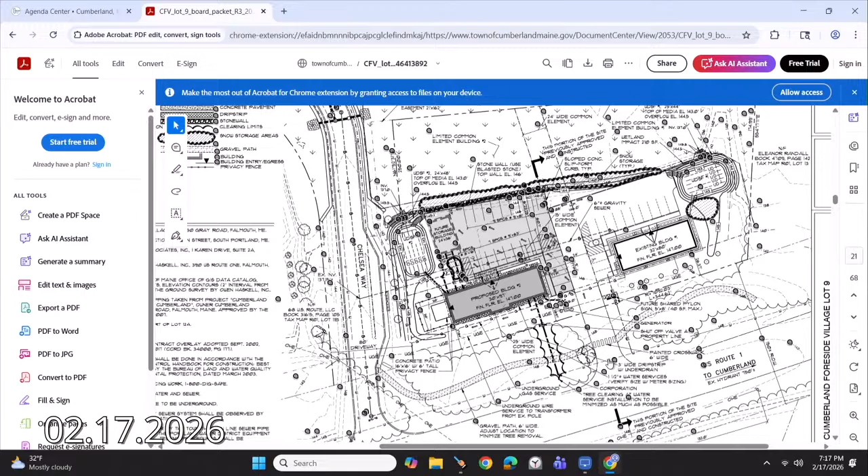Okay, and you have no idea who the new tenants or new owners will be, but you're convinced there's a market for it as well? I have no idea who the tenants will be on the first floor, commercial-wise. I'm very confident, owning 96 units behind there, that we'll be able to fill 2 luxury apartments up above, and I'm very confident that we'll be able to rent the 3 1,000 square foot spaces. I'm sorry, I guess I somehow missed that - so it's mixed use? Yes, mixed use. Oh cool, yeah okay. I apologize if I didn't make that clear. No, very cool, yep.

Any other questions from the board? Hearing none, I'll open up the public hearing. Is there anybody in the public that wishes to comment on this?

Bob Vale, Cumberland Center. Just a point of procedure. This is, in essence, a new application. The permitting has expired, so was the town attorney consulted? I would think that at a minimum it should be tabled. Like you said, we're in uncharted waters, and there's a chance of precedent being set here, so it should be tabled and a town attorney provide direction, because I think the findings of fact need to be read.

I agree, it is new. We agree with that. Yeah, I looked at it as a new application. That's the way I reviewed it. It's 8 years old, so it is new, we agreed. We're treating this as a new application. It's just that you already have all the information necessary to make a decision.

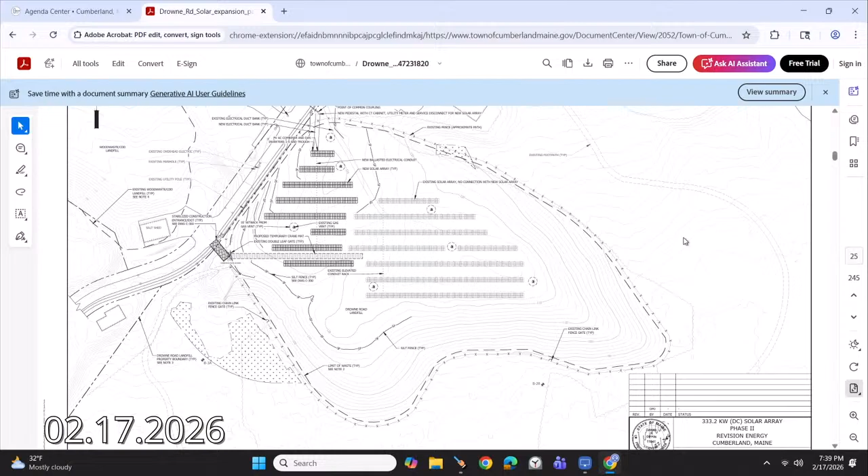I requested today if they could give me a projected timeline of that approval. It varies a little bit. The solid waste approval isn't tied to the timeline standards of the Land Bureau right now. So the last couple of these that we've done range from about 3 to 6 months. Ideally the DEP is through their approval later this spring, and then we'd be able to pursue construction in the dry summer months, which is the ideal time to be on a landfill cap to minimize any damage to the cap. So I can quickly walk you through the plan and then take questions.

Similar to the other system, the interconnection is at the north of the site. This project can exist within the existing fence, so there's no additional fence needed to meet electrical code or security needs. A couple of updates to the system from the other one, since this landfill project is about 6 years newer.

The old project had cast-in-place concrete ballast, which sits atop the landfill cap, so there's no penetration of the cap. The newer system uses what's called crushed stone ballast. So instead of bringing a concrete truck onto the cap, you essentially have crushed stone and assembled baskets that sit on top of the cap as ballast, and the racking system is built into those — crushed stone versus concrete.

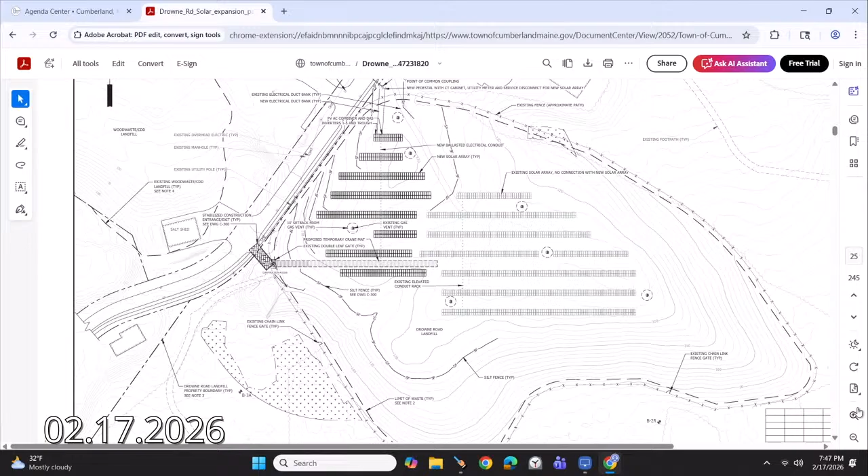It sounds as though I see no buffering - has anyone thought about the idea of that? Yeah, we talked about buffering with planning and codes during a pre-application conference. The conversation was that it would be consistent with what's there, to not create a significant change to the area. The bigger thing that codes had raised was that we can't plant vegetation within the limit of waste of the landfill, which goes pretty much up to Drowne Road, and the space between the road and the fence would be limited, where they had identified that as not something they would be looking to require. If it was something to look further at, then that's a question to reopen with codes, planning, and Matt. So that was the initial discussion.

How much room is between the fence and the road? Not much, not a lot. I think there's - and I forget what's right there because of the snow right now - a small grassy knoll, so not a huge amount.

So are you saying then that because of the cap, we can't do a buffer, or is it possible to do it? Driving up there, as close to the road as they are, I think it would be more aesthetic to put some buffering in there. I think it would be a question we can look at with codes and engineering, just with the space of that gap. If there's a standard on encroaching on the roadway with vegetation, if dense bushes adjacent to the roadway is an issue. But it's something we could look at with codes and engineering, to see what would fit in that space.

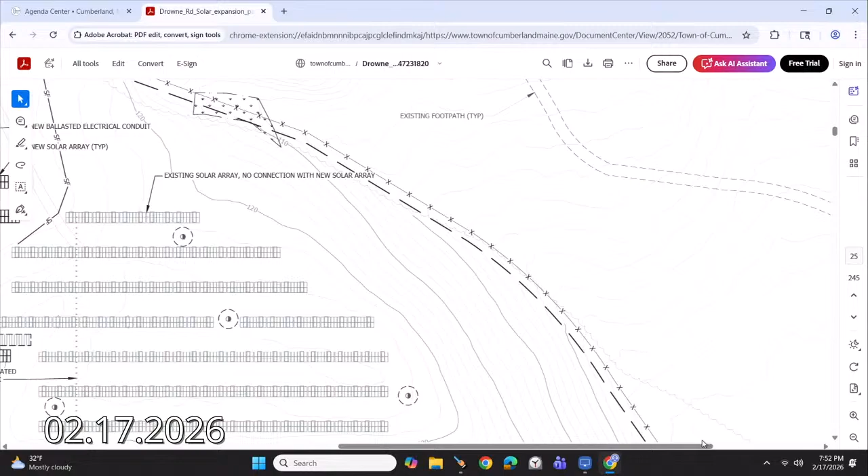This is a great project for the town. Specifically, it helps us meet our climate action plan goals, which have been laid out and approved by the council years ago. We were one of the first towns in the state to actually get a climate action plan. Fiscally, it sets us up in very good stead. It helps us towards electrical independence for all town facilities, town, not school, but that's huge for us, and it gives us long-term fiscal and financial stability without the volatility we all experience with our electrical expenses, most notably after January 1 of this year, based on my own experience paying my electrical bills. So it helps us in that regard, it gives us that stability.

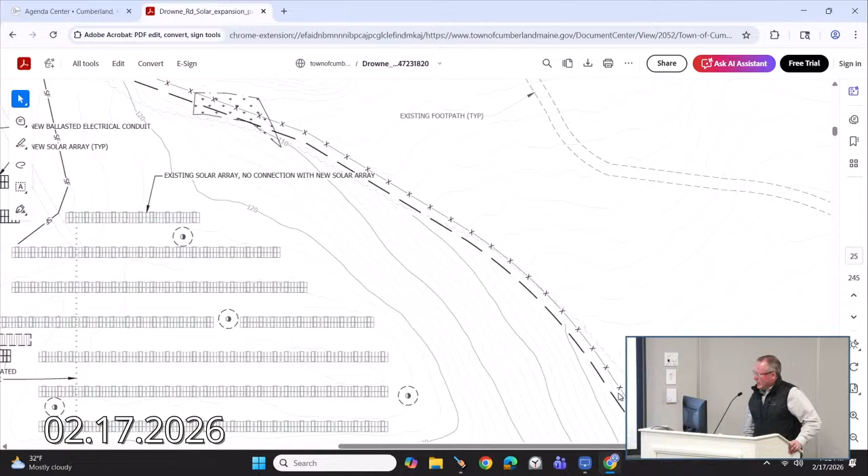We have, I think, a 6-year break-even point, and a big portion of that was the timing. We took advantage of the prior tax structure that expired December 31st or January 1st, which helped us take advantage of credits that exist out there to offset our acquisition expense.

That was significant. We also have the ability to use the renewable energy credits and syndicate those, so we can generate revenue from that as well, to the extent the market will provide it. That gives us some passive revenue to help offset the town's expense, which also expedites our break-even point. The big takeaways are energy independence, long-term financial stability, cost certainty, as well as meeting our climate goals.

Those are also very difficult goals to attain, so we're very proud of that, and the council funded it all this past year. The town had the funds available, so we took advantage of favorable federal tax laws and timing and good positions in the market.

Revision's been great to work with on that for us. If you want to go back and look at some council meetings from last spring and early summer, they looked at all the financials, provided good guidance, and expedited the acquisition. We needed to pull the trigger on ordering the equipment before the turn of the calendar, and they did all of that for us so we could take advantage of all the benefits out there. It's a great project for us.

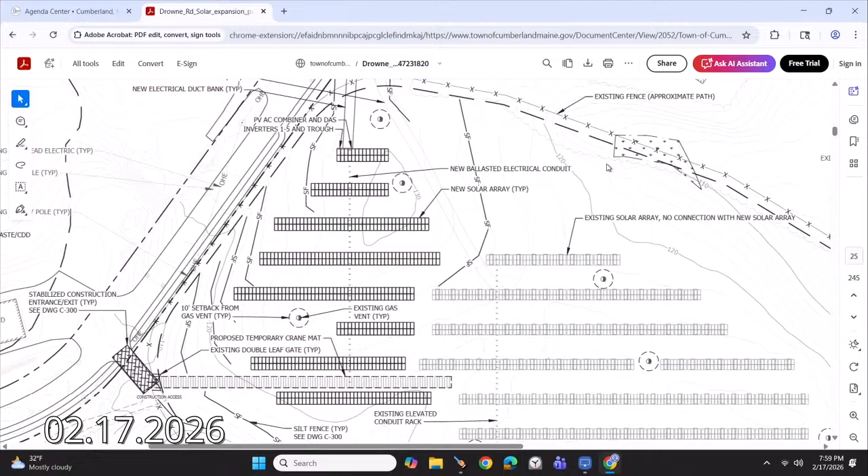Any other questions or comments from the board? If not, I'll open the public hearing. Is there anybody from the public that wishes to comment on this? Hearing none, I'll close the public hearing and go back to the board.

Are we ready to read the findings of fact? And I did it again—I listed the limitation of approval instead of the expiration of approval. At least it's consistent, rookie mistake. So Lorraine, can you lead us through the findings of fact? Yes, I can. Spreading the wealth.

Findings of fact are written as, I'm going to read: A, utilization of the site. The planning board finds the standard is satisfied because the additional array is situated within an existing fenced area and designed to minimize impact to adjacent properties and natural resources.

B, traffic circulation and parking. The planning board finds this standard is satisfied because the overall parking plan is unchanged.

C, stormwater management and erosion control. The planning board finds this standard is satisfied because the installation of the additional array will cause minimal disturbance that will not have adverse impacts on abutting and downstream properties.

D, water, sewer, and fire protection. The planning board finds this standard is not applicable because a solar array does not use water, sewer, or fire protection. The planning board finds the site is not located within a town aquifer protection area and finds the project will not impact groundwater.

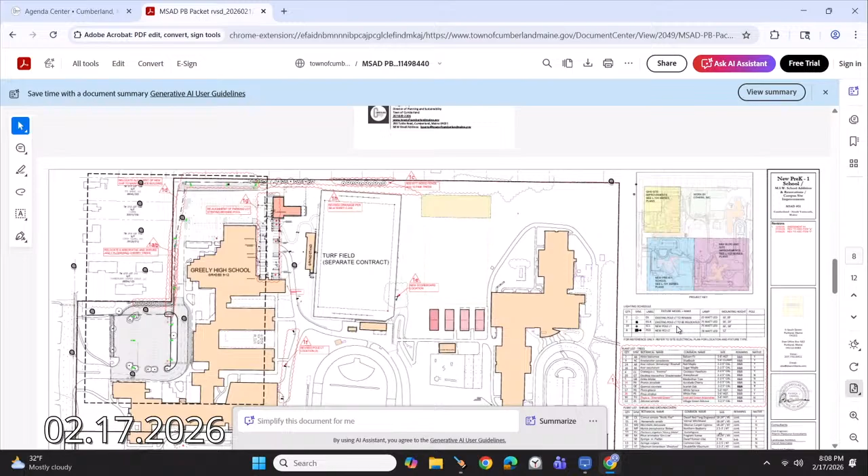Can you pull up the site plan? Yeah, it's in here. This one. Yeah, and if you could, maybe zoom into the upper quadrant, because that's really what we're talking about.

So my name is Pat Carroll, I'm with Carroll Associates, as Peter said. We've been working on a school construction project that started last summer. A lot of the focus of the amendment is really on work that was done during the summer construction period, summer through fall of this last year.

There were some changes that were made, a lot of which Bridget and Bill were kind of aware of, but we didn't formally go through with a de minimis change request as I think we're supposed to do. So I want to apologize for that.

I also want to apologize for missing last month's meeting. I don't know how that happened. I've been doing this for 40 years and I've never missed a meeting before, but somehow that one - I think it was a combination of the holidays, and I don't think we actually got an agenda. Usually we get one a few days ahead of time. We didn't get one that week, and I think Scott and I both kind of missed it for some weird reason. It was really kind of embarrassing.

I definitely missed it. But anyway, most of these changes are very minor in nature, but they are changes to the approved site plan. So I wanted to go through those with you, explain why the changes were made, and then offer any comments on any questions you may have about it.

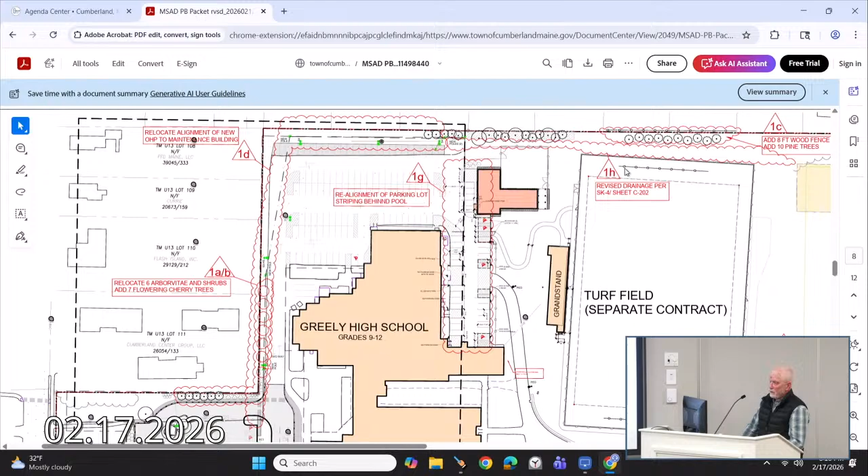So the engineer came in and decided that what we really needed to do was riprap that swale. There was a memo I submitted to you with his initial comment back to the contractor and the owner that we've tried to do this, these storms are really crazy, and we really need to get this done. We were at a point where we were ready to put turf down on this field - the base was all just perfect, it had been tested for permeability and everything else, and we had a pretty major washout, this whole corner had to be rebuilt right before this happened. So it was kind of an emergency situation that we needed to do this in order to stay on schedule.

It's definitely something we probably should have run by Bridget and the town engineer, but we did have our engineer update the stormwater management plan to include this riprap swale in their calculations, and everything seemed to work okay. I think the town engineer at Sevee & Maher has signed off on that. So those are really the improvements that we're asking for an amendment to the site plan on, and like I say, they're minor in nature. A lot of those we've had informal discussions with the town on, but we hadn't really made a formal requisition or request to have those changes made, and I guess we're going to do that from now on.

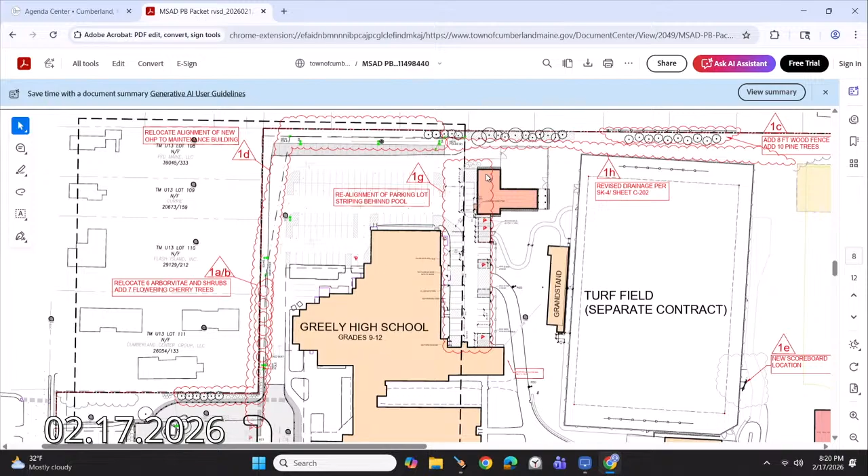Well, we can talk about that. It's not included in this, I don't think we've even broached it with Bridget yet. But there's a neighbor here that when the lights went in for this new maintenance building, they're over the garage doors, and they just shine down. The garage doors are white, and it creates a lot of glare. Scott's been working with this property owner, and we did plant some trees, and they have trees on their side of the line, but the lighting was still an issue.

And the headlights too. So we've proposed, and I think the neighbors agreed, to put an 8-foot fence in along that section of their property line, along with some changes to the timing on the lights. Are they going to go on a motion detector? A motion detector, so that should solve that problem.

So do we need to add that in as one of the conditions of approval, or how do we do that, Bridget? I don't think it's a condition of approval. It's going to have to be reflected on the site plan at some point, correct? Yeah, so I think they're just going to have to move forward with it. I guess what I would propose is that we deal with that as a de minimis change, which a lot of these should be and could have been if we had worked with the town on that. And then at the end, we are required to provide an as-built drawing.

Correct. Okay, quick question. You're talking about a garage door that's facing the backside? It's the lights above the garage door. Is that what you're talking about? Yeah, on that side, garage facing the doors, the neighbor. I think there's 2 or 3 bays there.

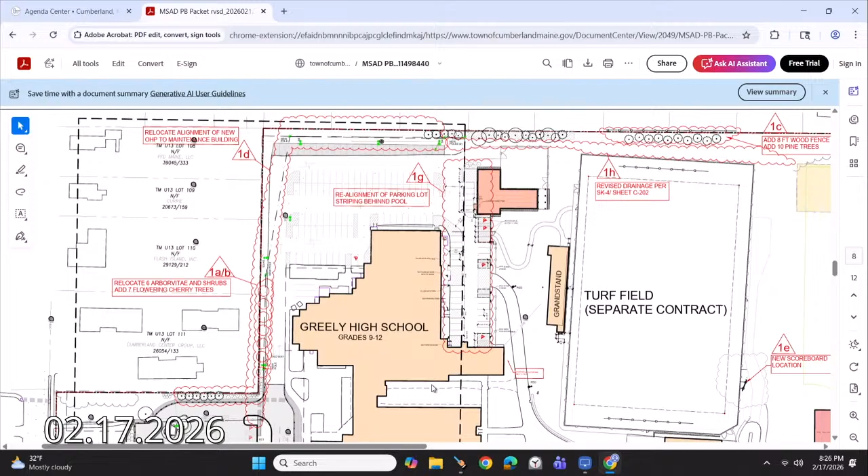Okay, any other questions? I don't know if it's pertinent for now, but I appreciate your humility and the apology for not showing up last month. Hopefully any viewers or people that were here last month that showed up for that accept that apology as well. But definitely appreciate the humility on that. Thank you. Okay, anything else?

Before I open the public hearing, I'll just do this brief letter from Lee Buffington, regarding the paragraph on removal of 3 maple trees in addition to 7 flowering cherry trees along the west side of GHS driveway along neighboring property, completed upon neighbor's request with town planner. His writing is, this is a very misleading statement that makes it sound like we neighbors requested the school to remove the 3 maple trees that the school district removed in violation of approved site plan. As you know, we were upset at the removal of the 3 maple trees, which then triggered the remediation plan consisting of planting the 7 cherry trees to which we agreed and you approved. Please alert the planning board of the need of clarifying language to set the record straight at Tuesday's planning board meeting, and that has been done.

Yeah, and if you don't like it, we can reword it. I was just trying to list the changes that have been made in the bullet points. So I did the removal of 3 maple trees, and then a new bullet point was the addition of the 7 flowering cherry trees.

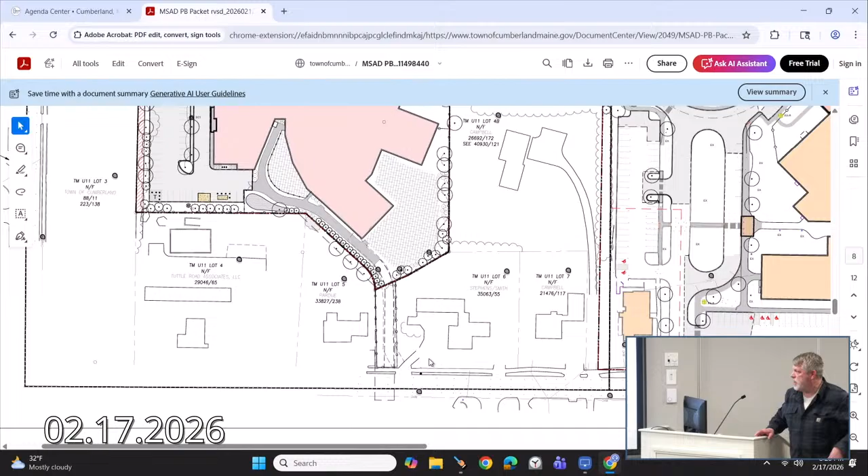The scoreboard, does that have speakers on it? No, okay. What I'm most concerned about is the trees that are being removed. According to the town center design standards, for every tree that is removed, a like-sized tree should be planted. And I think I counted 200 trees that were removed from the site, and I cataloged it. I'm concerned, since the maintenance shed has been pulled down, where my property is here, all of this, the vehicles coming in, the headlights, this comes towards my property. I just wanted to bring that up, that's something that I think got overlooked, and it's a pretty substantial impact to the center of the town. If you could take that into consideration for future trees and things in that site plan. I think that's it.

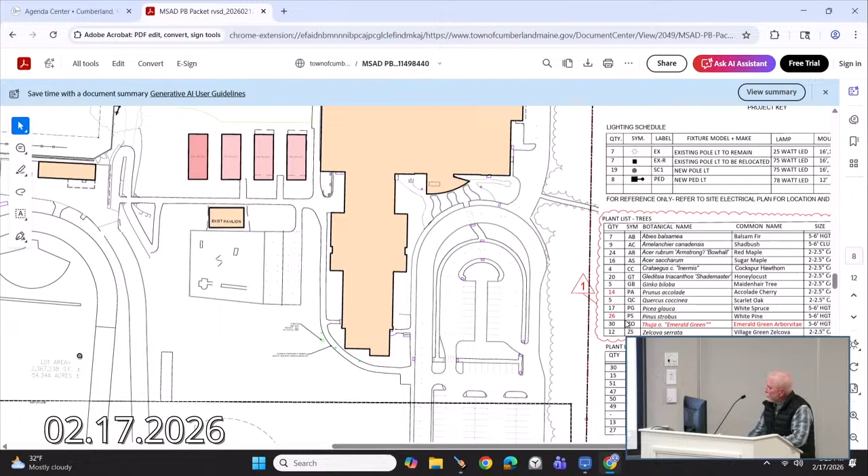Anything else? Yes, it appears to me that's kind of a legitimate suggestion. Well, I don't have an exact quantity of trees. It might be on here, but if you counted up all of these trees that are here, there's 42, 68, 80. There's probably more than 200 trees being proposed to be planted on this campus before all is said and done.

But I think we're talking about specifically now that they've taken the maintenance shed down and seeing what the effect of that is and the aesthetics, not only to his property, but people coming down Tuttle Road. I mean, I think I understand. First of all, he was talking about the ordinance requiring trees to be replaced, and I think we're more than covering the number of trees. I don't know if there were 200 trees that were removed. We didn't do a count because we didn't have individual trees on the survey. But as far as his other concern, this area over here, if you remember, we went to the council, and there is a 15-foot no-cut zone that's along this side of the parking lot. Or wait a minute, I'm on the wrong, you're in the wrong school.

Here we go. There's a 15-foot no-cut zone along here, which we're supplementing with trees. There's probably 10 or 12 trees being supplemented along there. There's a 6-foot fence that runs continuous along this property line all the way down. In fact, at this point it turns to an 8-foot fence, and runs down 8-foot all the way along here, then a 6-foot fence all the way up along here.

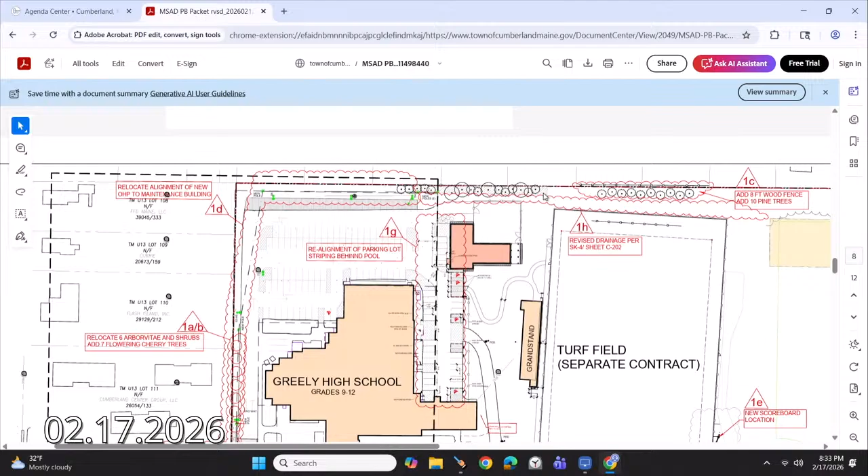There's no doubt, and I think we've been working with all the neighbors. We've probably talked to just about every neighbor that abuts this campus. Working with the neighbors over here, we've kind of adjusted things and added some things here. Working with the neighbor back here, we've added some trees and adjusted things. We're adding fencing in here. So we're always going to listen to the neighbors.

And if, when push comes to shove, there's still issues with this, I think the district is more than willing to look at doing some additional work. I'll look at Stacy then. Go ahead.

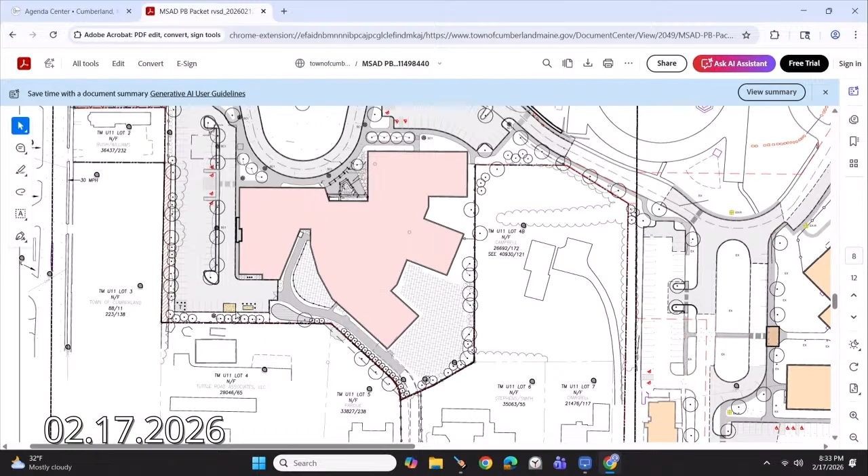That's all right. I was just going to say, I know that when we approved this, the last two things we talked about were making sure that the abutters had their property placed back in the same way it was before you guys showed up, or better condition.

We did, and we've worked with Mr. Pardue. I've probably met with him 5 times. Since the maintenance facilities came down, there's some additional trees that were taken down from that area.

I'm concerned, and, as far as you can go to the podium, I think the public wants to hear you also. Please, to the podium. You can stay.

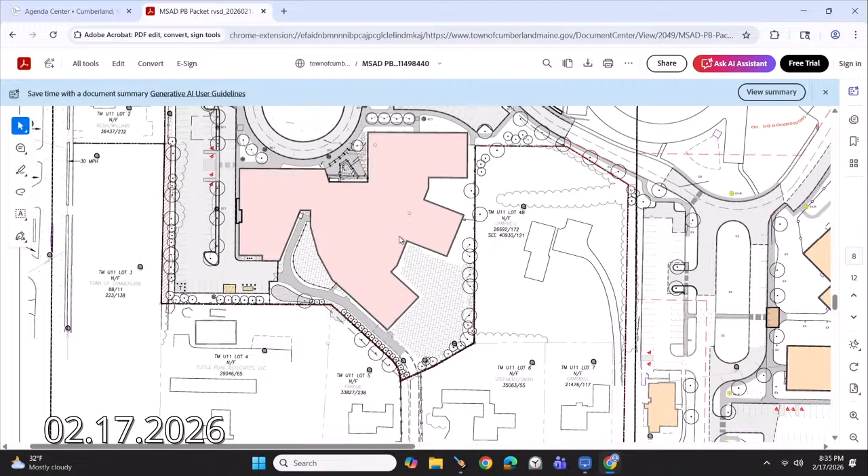I think the town center design standard says no matter how long it is, it could be 10 years, if the trees go down there, they have to put them back if they're not providing what the intent was at the beginning, not just the 1 year.

Yeah, I would just urge everyone to kind of let's just look at this when it's finished. I'm sorry, I can't hear you, sir. We can't hear you. I would just urge everyone to be patient about this, because we've got a long ways to go. We've got another year and a half of construction before this gets finished up, and there's plenty of time to review things and understand what the impacts really are.

And I think the district has always been trying to be a good neighbor on this. So if there are issues, we're going to take care of it.

I think my biggest concern, to that gentleman's point, is that we've already seen a pattern of things happening and then we go to the town after the fact. If something's going to happen, we should go to the town and make the amendment before we start cutting down trees or doing other things that impact the neighbors. Going the proper route is the important part. The neighbors would have more faith in it if it's not, hey, after the fact we're going to put up a fence, after the fact we're going to fix this or that, or put up 7 cherry trees instead of 3 maple trees. The procedure is just as important as the outcome here.